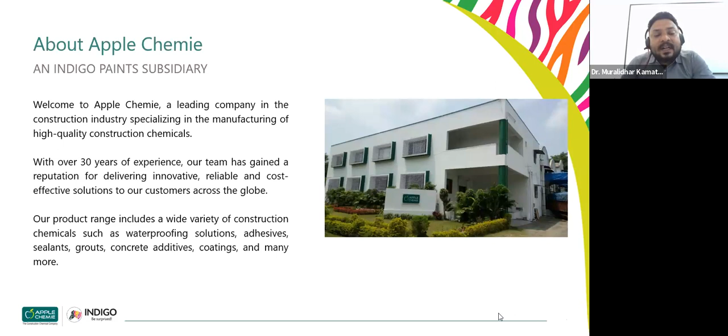It's an Indigo Paints subsidiary company, and it's been around for the past 30 years, and we are providing a range of construction chemicals like waterproofing, adhesives, sealants, grout, concrete additives, coatings, and many more. What is Apple Chemie? India's only concrete tech company, manufactures more than 150 products, 25 years of experience, geographically centered in India, and the first manufacturer of PCE. What is PCE? It's polycarboxylic based ether, and we brought that plant for the first time in India, and we have presence on a pan-India basis too.

Why is it innovative? First, polycarboxylic based ether, then AC Crystacrete, which is a crystalline durability enhancing admixture. I'll elaborate more about Crystacrete - it's available in Bulker form, and we have 6 patents. These are the patents, I'll be quick over here. This is a granted patent, and this is the pilot plant.

Whenever we talk about polycarboxylic based ether, you may know it by the name superplasticizer or plasticizer in your books. There are different types of base for this. I'll come and explain about the bases, but that will come in the admixture part.

Okay, that time you can see over there what is PCE and how we are calling it a base. So these are the pilot plant. This is our R&D facility. It is in Nagpur. This is in Mumbai.

I'll start with the crystalline admixture because I don't want to waste much time. It's been on the internet too. So what is crystalline admixture over here?

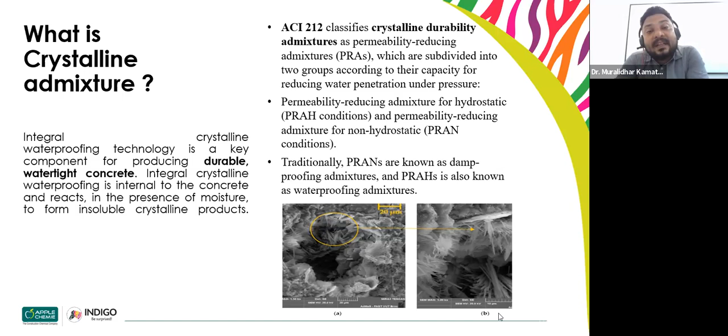You can see projects like Samriddhi Expressway, Delhi Mumbai Expressway. In their specifications, we have to add this crystalline admixture to enhance the life span of the structure. Similarly, if you check the bullet train specification, there also you are required to add this crystalline durability enhancing admixture. So this is one of the products we are also supplying.

It is a cementitious product, and it will plug your pores, capillary tracts, and micro cracks will also be reduced, blocking the entrance of water. Due to crystal formation, whether it be chemical attack, water in coastal areas, or environmental conditions wherever your concrete is exposed, whenever concrete gets deteriorated, it goes through the cracks or pores only.

That is called transport property. It's a new term, maybe you have to find out what is the transport property of concrete. Because of carbonation, air and moisture get transferred from inside the concrete, and that creates a problem. Due to that, the crystalline durability enhancing admixture is added.

This is ISO patented technology. If we add this in your concrete, you can see the fourth picture above, the CE certificate, CE being the European certificate. In that, let's say if you add this material in concrete...

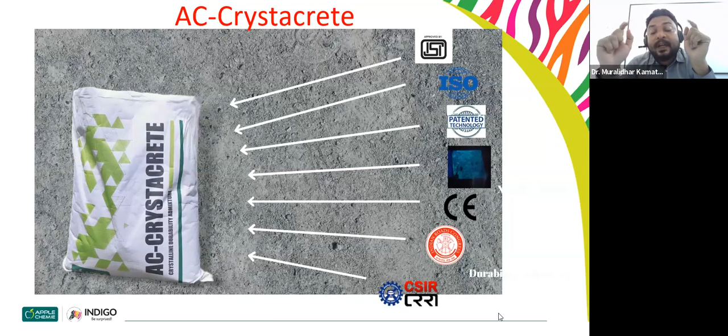You have to wear UV glasses and scan the concrete to check whether it was added or not, because for quality purposes it gives a fluorescent color. So you can check in the concrete for quality purposes. Crystalline admixture present here will self-heal and give durability to your project.

These are the testing facilities. You have to do the Marsh cone test, that is for compatibility with the cement. Because when you are adding crystalline, the main component will be cement or cementitious component, so you have to check the compatibility of the crystalline durability enhancing admixture, then sulfate resistance test, then rapid chloride test.

Sulfate resistance relates to chemical attack, right? And rapid chloride penetration is tested as per ASTM C1202, the latest code being from 2019. From that you have to check, and we pass the ions. I'm going to explain this experiment a little bit further.

Then self-healing test, this is a lab test. Then mortar permeability - maybe many people are not aware of mortar permeability. At last, whenever you test the crystalline durability enhancing admixture, water or any ingress chemicals, or whatever environmental condition is outside, it is not going to travel through your aggregate, it is going to travel through your mortar phase only. So due to that, the mortar permeability test is there.

Concrete permeability has two tests, I'm going to explain in detail. First is depth of penetration which we check, and then we check coefficient of permeability. Both are different - depth of penetration requires four cycles, and water permeability requires only one cycle.

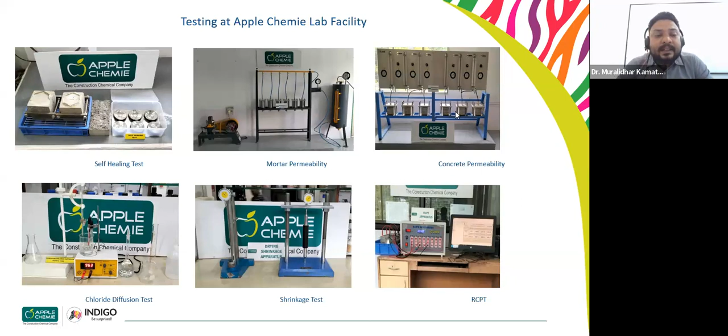Then your chloride diffusion test, shrinkage test, RCPT - these are all required tests. Testing has to be done from various authorities because you have to rely on a third party. If I am saying my material is good, it's not like that - crystalline durability enhancing admixture has to be checked through many various third party authorities.

Then what's the difference between integral waterproofing and integral crystalline waterproofing? In the market there are these two terms. Integral waterproofing adheres to IS 2645. Integral crystalline waterproofing is part of your concrete itself.

It adheres to ACI 212.3R-10, chapter 15, as I already said. Here it is not going to block your micropores, but in crystalline it is going to the micropores and it resists hydrostatic pressure.

In piling in Mumbai region or any coastal region - let's say Chennai, Mumbai, or Vishakhapatnam - wherever they are doing piling up to 100 or 200 meters, for the concrete piles they need to check with 16 bar water pressure, not 5 bar. The regular water permeability test is of 5 bar water pressure, but in the case of pile condition, they require 16 bar. At that time also this crystalline needs to be added.

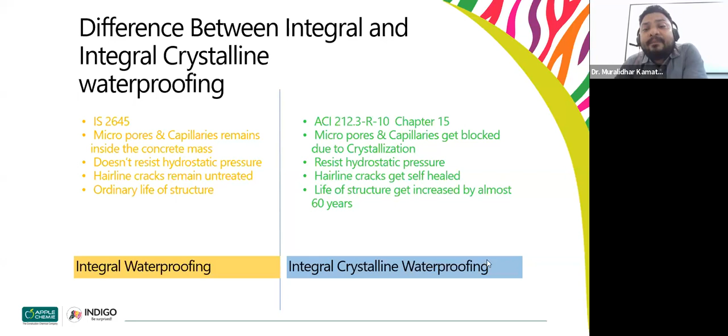So that's the advancement in construction - it's not only about cement and micro materials we are going to add nowadays. The crystalline products are being used, and the hairline cracks get healed, life of structure gets increased. How it is going to increase, that also I'm going to show you. And it is available in bulker.

Then the relation between durability versus permeability of concrete. What does durability mean here? Durability of concrete means the ability to resist weathering actions, chemical attack, and abrasion while maintaining its desired engineering properties - meaning whatever the compressive strength, flexural strength, or mechanical properties are, it should not be changed, if I am going to add this crystalline material.

As a designer, whenever you are going to design, let's say from IS 10262 - updated from 2019 I think - if you check over there for design service life, the mean strength Fm is equal to Fck plus 1.65 into S, where S is standard deviation. If we check this overall equation, there is no term called T - there is no time, right?

So we are not designing our concrete for any time. We are saying it is going to withstand 40 years, 50 years, 100 years - we are saying it, but we are not using time in our design. We say design service life will be 50 years, but when we are checking with permeability, the latest code is going to develop.

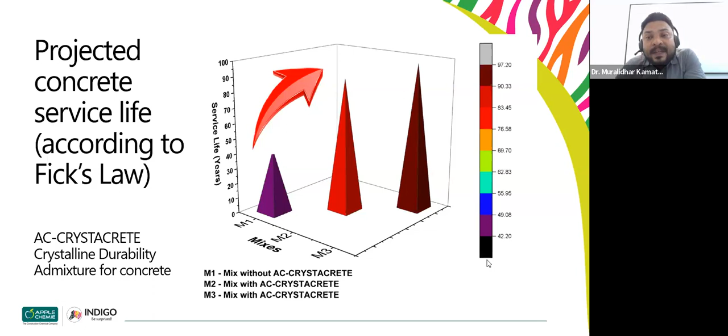Then Crystal Mortar, sometimes mortar is also required as a repair material. One of the sites I'll mention, I've been at a Shapoorji Pallonji site in Mumbai, the BDD Chawl site, a building going up to around 40 floors. They already excavated up to 18 meters below, and what happens is the water table is very high in Mumbai.

So after the shore piling also, they give the retention wall to the soil just after that, because we can't move soil since there are buildings in the vicinity. So this Crystal Plug is used, it is in powder form, wherever water is coming we have to put it and block that.

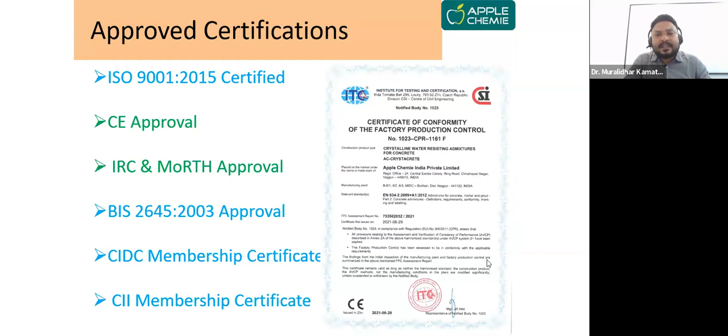And we have approval authorities there. I think it is not right now, but we have to get approvals from the industrial part. We have to go through all the approvals, then only we can apply this Crystacrete.

Then the application method of Crystacrete, how it is going to be used: nowadays we are using only ready mix concrete plants, so you can add it directly into the RMC, it comes in 25 kg bags, you can add it there or add it inside. Then you can apply it as a surface coating, for sealing cracks, and for the heel.

Dry shake I already explained recently. These are the surface preparations.

Now, what are the advantages? Here you can see, below there are cracks of 2 mm. This is after cracking and before cracking, you can see. And it reduces and can heal up to 0.5 mm crack healing.

As you can see, this is a test we are doing, a lab-developed test I created. I connected it with pumps supplying a continuous head of water throughout. I am cracking a concrete cube of 150mm, splitting it, then creating a watertight seal and keeping that water pressure over it. If it does not self-heal, water will pass through. If it self-heals, water will not pass.

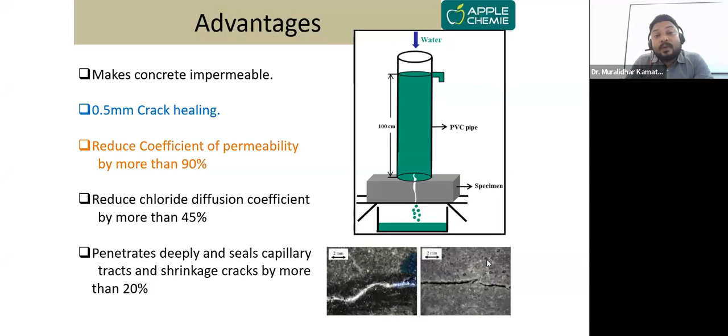And it should have coefficient of permeability improvement of more than 90%. Chloride diffusion should be reduced by around 45%. And shrinkage should be reduced by more than 20%. It allows concrete to breathe while protecting it.

If it is an integral part of the concrete, it is going to protect your steel bar from corrosion, and I'm going to speak a little more about corrosion later. And it has effective resistance, as I already told.

Now if I'm adding crystalline product into our concrete, I need to test it. What are the testing parameters? The specification always says how we are going to test it and what will be the parameters.

So: rapid chloride penetration test, water penetration test, and self-healing capacity. Okay, these are the tests.

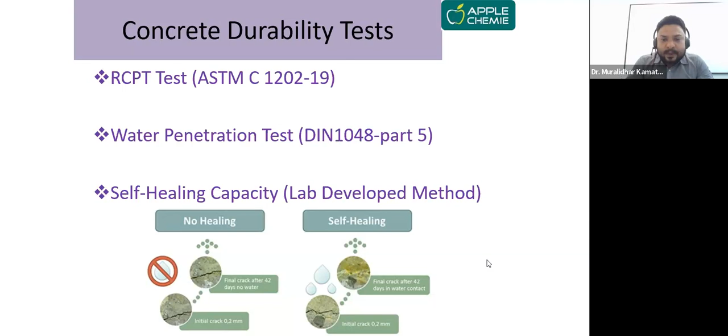Now here you can see the water penetration test. It is as per DIN 1048 part 5. The fixing screw and test specimen are kept under water pressure of 5 bar.

We keep it at 5 bar for 72 hours for the water permeability test. After 72 hours, up to 48 hours, we keep it in a drying cycle, meaning the water level is removed and the cube dries. Then we split it and check the impression of water penetration on the concrete surface after splitting, and mark it. This is one cycle, where you check the depth of penetration.

But what about the coefficient of permeability? You cast two cubes, one with crystalline mix design and another without crystalline mix design. Three cubes are cast at a time, and kept for cycles.

There will be 4 cycles: 72 hours of water pressure, then 48 hours of drying cycle. This is one cycle. Then you repeat 72 hours of water pressure, 48 hours of drying period. Similarly for the third and fourth cycles.

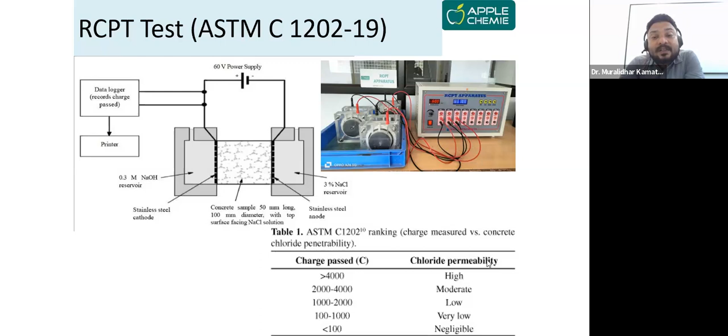At that time you require the advanced chemical, because they are targeting the age of the concrete. They are trying to build the structure for 100 to 150 years. Due to that, they use this type of material.

So liter per hour is what we are measuring. If it is going to zero, that means the water passing through is getting self-healed. Wherever the water supply is going on through the cracks, that means it's not getting healed. So it's like that.

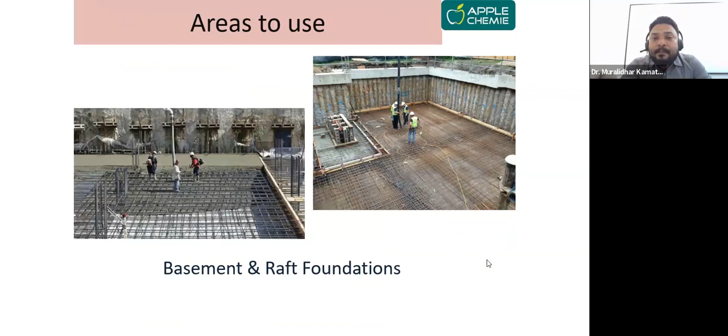The experiment is just a self-development method area to use, where generally, as I told, at the foundation level, as you can see in this image, sure piles are there at the foundation levels. And then precast girders, shotcrete, swimming pools, water retaining structures, aquarium, retaining walls, sewage and water treatment plants, underground vaults, elevator shafts, dams and reservoirs.

And already we supplied to Nagpur, Mumbai, super communication expressway, Delhi Metro, Thane Creek. Recently it's going on at Thane Creek Bridge, which is being constructed by L&T, as I've visited and I'm working with them.

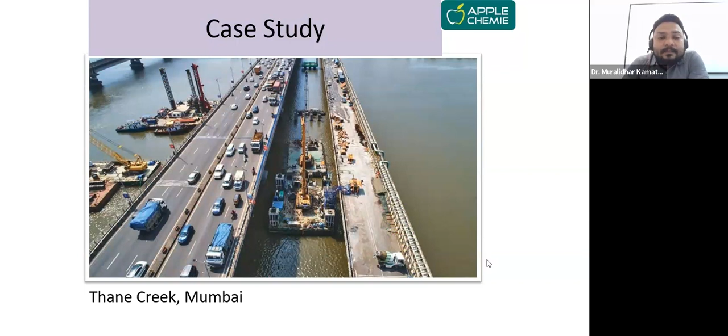And then CIDCO housing project is a mass housing project. I've been to BG Shirke, who is one of our clients over there. They are casting at a precast yard - you can't imagine how much concrete is going on. I've been there for a month to resolve some of their technical issues. The daily concreting is 1500 meter cube per day. That amount of concrete and that amount of panels they are casting, almost like machines. It's been a good project, CIDCO going on at Taloja.

One more example I'd like to quote here - L&T delivered one of their recent projects, and we were involved in that: 75 days, 75 flats. This is the rapid construction industry I'm talking about. L&T did this in Mumbai - you can search it on YouTube, it's available. Also Chhatrapati Shivaji Maharaj International Airport, Versova Bandra Sea Link - these are our clients.

This IRC also mentions crystalline durability enhancing admixture - that's what I'm talking about. I told you about our crystalline durability enhancing admixture. Now I'm coming to admixtures. What are admixtures? Why are we going to use admixture?

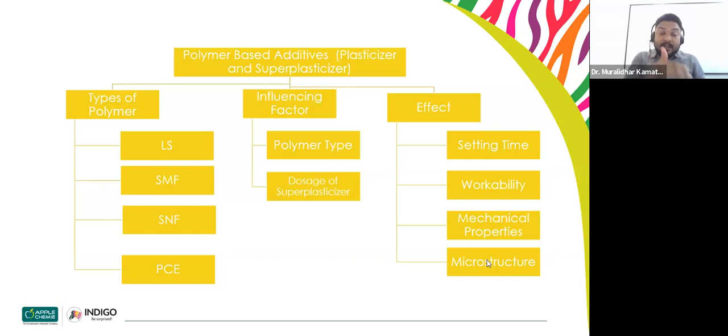An influencing factor here - if you're going with ligno base only, you can go with 1 hour maximum, there won't be much more. Nowadays everyone is asking for self compacting concrete, free flow concrete, or pumpable concrete at the industry level, so you can't go with LS for that.

SMF is also not compatible, because they're using 3 to 4 types of brands of cement - sometimes 43 grade, sometimes 53 grade - again source of aggregate, source of cement, source of whatever material you're using, it's changing totally. So you require great compatibility with your admixtures.

Then sulfonated naphthalene formaldehyde you can use, but not everywhere. With that you can achieve SCC, but the admixture percentage and chemical required will be more. Then with PCE you can go from 0.5 to 1.5 percent, depending on your aggregate, design, and grade of concrete. Dosage of plasticizer is also an influencing factor here - it can affect your setting time, workability of concrete, mechanical properties, and if it's a higher grade of concrete, then for sure it affects the microstructure.

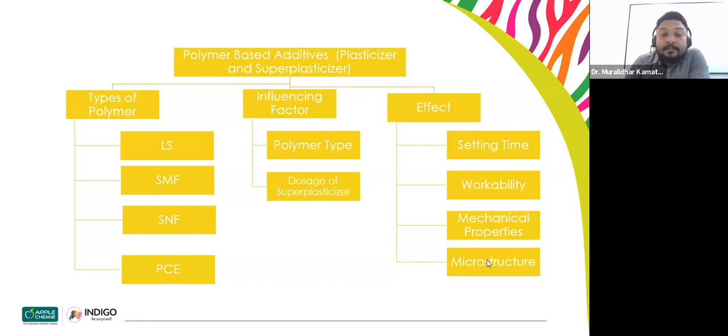Plasticizers are chemical compounds that reduce your water percentage whenever you use them. The water-cement ratio is inversely proportional to concrete compressive strength. So if I reduce the water, the concrete compressive strength is going to increase. This helps and makes concrete denser.

Plasticizer and superplasticizer are nowadays added in the range of 0.1, 0.5 to 1.5%. Many people ask me, can't we go above 1.5%? I'll give an example: Okamura developed self-compacting concrete in the 1980s, and he started with 6% of added chemicals at that time. So it's not that you can't add above 1.5%, depending upon your need you can add that.

Plasticizers - lignosulfonate is a natural polymer, that we call plasticizer. Superplasticizers will be SNF, SMF, and PCE.

Nowadays whatever you are buying, whether from Fosroc, BASF, or Apple Chemie, we are giving you a product where there will be an air entraining agent, and in that only there will be a defoamer. Generally we use it for silt content, wherever silt content is high, because nowadays we are not using natural sands, we are using crushed sand. With crushed sand, the silt content will be from 15 to 20%. It's restricted to 15%, but at sites it won't be like that, it will be 20-25%.

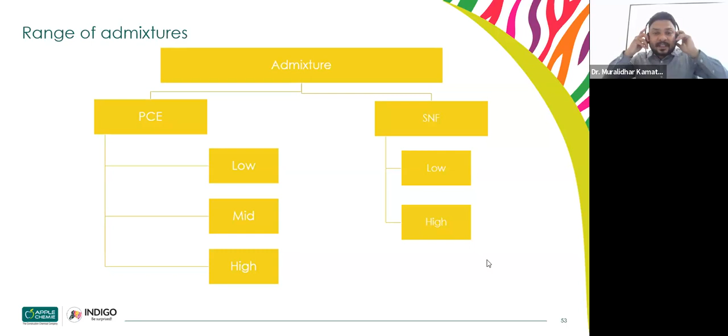Nowadays, as I said, the precast industry is asking for 10-hour strength. After 10 hours they require 15 MPa or 20 MPa because of lifting strength - they are going to lift the precast panels, so due to that their requirement is like that. And SNF will be low and high range, there's no mid range over there.

Then I'll come to curing compound and protection coatings. After you add your admixture to the concrete, there will be evaporation losses, and you require full hydration of the cement to achieve full compressive strength. Nowadays we are thinking more about sustainability and environment parameters, and we are not going to use water there - we are applying curing compound instead. Yes, there will be some environmental impact in production, but water is going to be saved. So evaporation losses are reduced, and it also helps reduce shrinkage cracks.

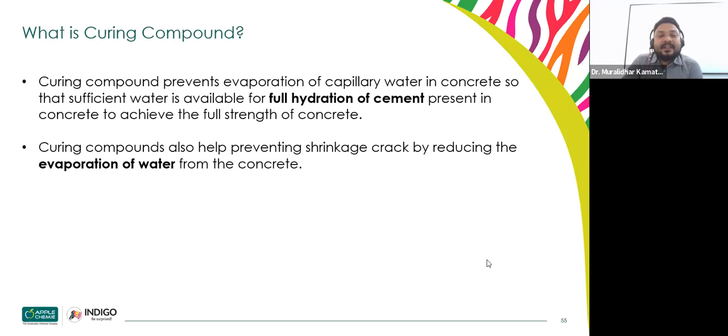Curing compounds are resin based, wax based, or water based. I'll explain it simply - whenever you use this type of compound, you have to ask your applicators, contractors or construction people whether they are going to paint, use putty, or whatever the surface requires, like in a building, metro project, or bridges. Depending upon what they are going to do, because over resin and wax based you can't paint or do anything, so that time water based is suggested. Generally in the housing sector we suggest water based curing compound.

These are the curing compounds - resin based, then aluminized reflective type, water based, wax based. Wax based is generally used for roads and canals, irrigation projects where there will be canals. Regarding coverage, we check curing efficiency, and drying time should be less than 4 hours. If you look at the various effects of curing practice on strength, in the laboratory, air curing gives less strength than moist curing. After 7 days of moist curing, the strength is comparatively 4-5 MPa more.

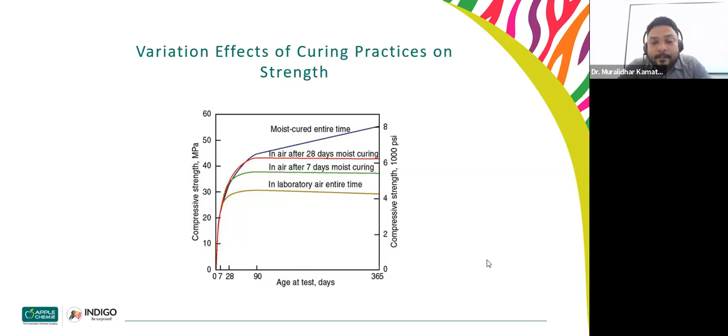Again, when in air after 28 days of moist curing, the strength is gaining over there. But moist cured entire time, meaning throughout the time we are curing, it is gaining again above 50 MPa, meaning after 365 days when we are checking. Okay, these tests are saying about that.

What are the properties of curing compound? Curing compound, whenever you are going to apply, depends upon water retention, and it should be conducted as per C156. Then reflectance is the one thing where you check the daylight reflectance after applying your curing compound. When should you apply curing compound? That will be a question to you. I'll explain to you case by case, maybe I already explained it, I'll check. If not, I'll go explain that.

Drying time, the test should be conducted as per ASTM C309, class number 10.3. Then long term for routine, this is the routine test. Setting we will check, but generally it should be less than 4 hours. It should be tacky, just you will check it is tacky, then fine. Non-volatile content.

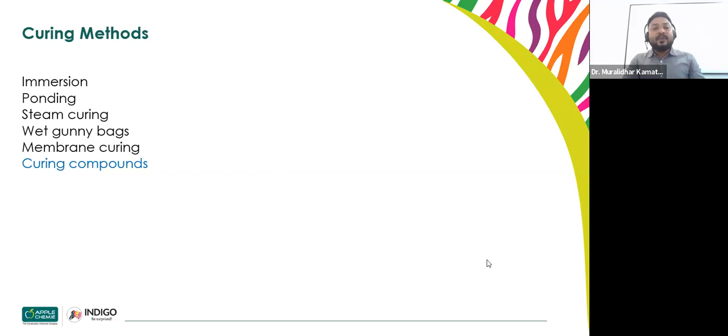Then there are curing methods in concrete: immersion, ponding, steam curing, wet gunny bags, membrane curing, then curing compound. So curing compound, whenever you are going to use, you can use in all structures: PQC pavement, structural members, columns, beams, canal lining, runways, bridges, decks, etc.

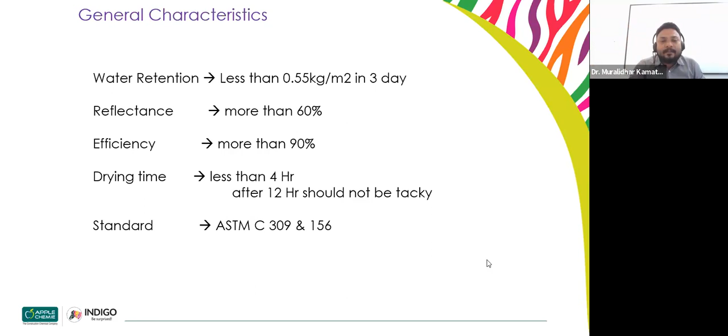And what you will do over here, you will cast the cube. One will be with curing compound, one will be inside your water tank for normal curing. In the lab, we apply the curing compound like a paint over the cube, and it should dry in less than, and it should be after 12 hours. It should not be tacky, we will check it, and it should be as per ASTM C309 and 156.

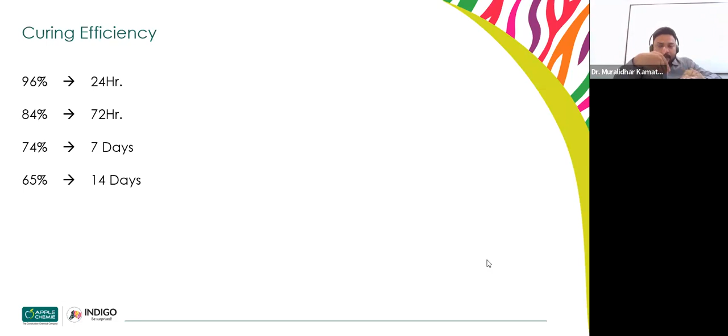The curing efficiency: at the first day when you check, the evaporation losses over the curing efficiency will be high, like water. Then after 72 hours when you check, it starts to diminish from the surface. Whenever curing compound we apply, it will get removed from there a little bit. Then after 7 days and 14 days, your curing efficiency will be around 65%, meaning the water is not there anymore because the membrane curing paint we applied will get removed, that compound gets removed.

And let the bleeding water dry, meaning at the top surface, after finishing your concrete surface, the bleeding water should get dry over your concrete surface.

And after your PQC, when you are doing your texturing and spraying, if you see that paver machine creating the PQC road, there will be one drum and two sprays there, and they will spray this curing compound after the green concrete, as you are doing the texturing of concrete. After that you apply the curing compound.

For structural members, if you are going to cast your beam and column or girders, whenever you remove the shuttering, that time you have to apply it. And you have to stir whenever you are applying curing compound for the protection coating. You have to first stir it well and make it homogeneous.

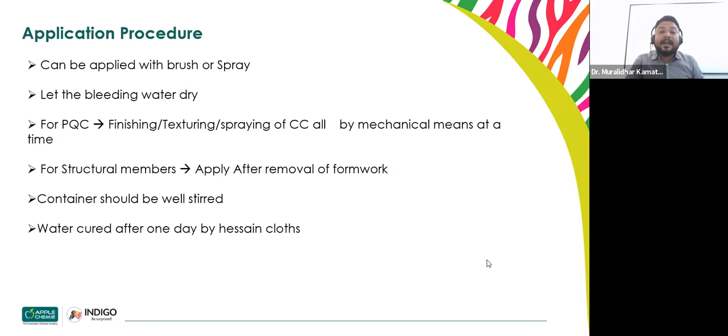Okay, and you can do water curing after 1 day by Hessian cloth also. This is one of the L&T's first segment for the third Mandovi bridge, Goa, and it came in Times of India, 25th of January 2019. Water conservation, what I am talking about: we saved over here 10 crore liters of water, it came over there. So that's what I am talking about.

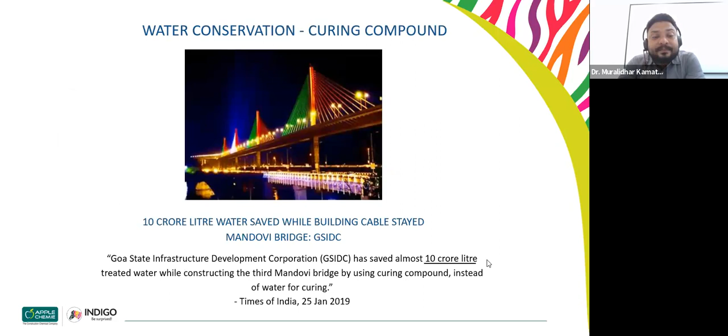Okay, you have to recommend the curing compound as your next generation solution, going to work at site and various places. So then again there are evaporation retarders also there, it will help, it's like a curing compound.

Generally in our region, the temperature will not go with 20 to 40 degrees Celsius throughout India, but in regions like Jammu Kashmir, you can find that the temperature will be low. At that time, evaporation retarders will be used.

Again, for protection of your foundation coating, there is coal tar epoxy based protection and curing membrane. Generally it will be a black surface applied to protect our foundation, because at the foundation level it is an extreme corrosive environment due to sulfate and chemical attacks from the soil or the ingress environment there.

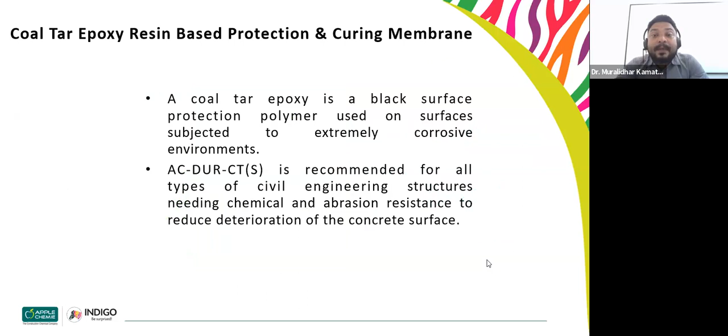These are curing compounds, and now I am coming to sealants. Sealants are used, for example, when we cut the groove in our PQC road for the 300 depth of concrete PQC road. When we are cutting, we cut it up to 100 or 50 depending on spec, generally 75 we do.

Then first we apply the primer over there, because we are putting the backer rod and there will be polysulfide sealant. So between the concrete surface, the sealant, and again the concrete surface, we require some primer to apply there so it sticks properly. Due to that we use it.

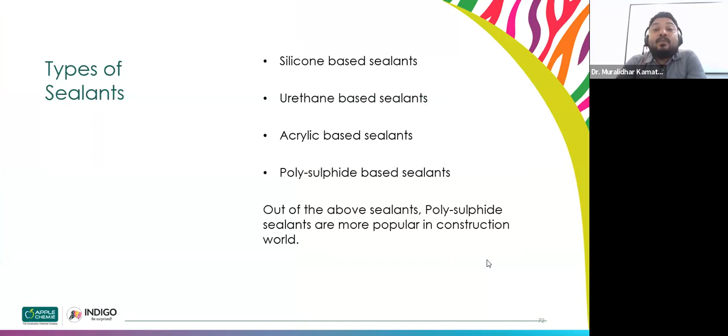The types of sealant depend on whether it's silicone based, polyurethane based, acrylic based, or polysulfide. Generally, out of all the above, polysulfide sealants are more popular in the construction world, because polysulfide sealants can be used in basements, glazing frames, ceiling joints, floors, roofs, external walls, claddings, and generally also in bridges. You can check and see it whenever you visit such structures.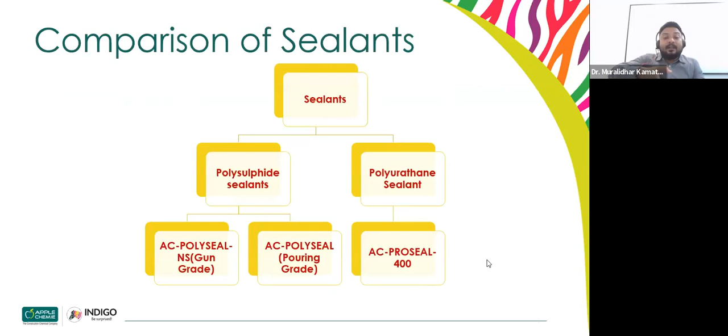Again, in sealant comparison, polysulfide sealant and polyurethane sealants are also being used, and that depends on whether it's gun grade or pouring grade - meaning you can pour it also, that also comes.

Over here you can see after the application, here in a building. It's used because concrete is exposed to environmental conditions, the cycle of temperatures changing - day and night temperatures are different, going through the full temperature cycle. Due to that there will be expansion and contraction.

So due to that we also call it a construction joint, or expansion and contraction joint, depending. It will be there vertically, and depending on the flow of traffic, that is the longitudinal joint, and perpendicular to the flow of traffic there will be the transverse joint.

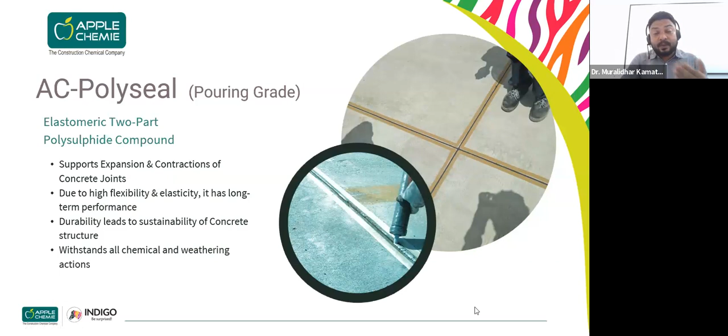So generally in the longitudinal joints you will check that this polysulfide sealant material will be there. Over here the gun will be used, and after finishing the surface of this polysulfide, there are two component and three component types, with fillers. Here you can see before and after applying.

Now we are going to start with adhesives. Segment bonding adhesive generally we use for precast girders, generally for bridge construction and metro projects, to establish a structural bond in between. So very simply, the grade of concrete will be M60 or M80 over here.

So this will be M60 grade of concrete on one side, and M60 grade of concrete when we are joining this. So this will be your critical section of crack whenever the load is going to be there.

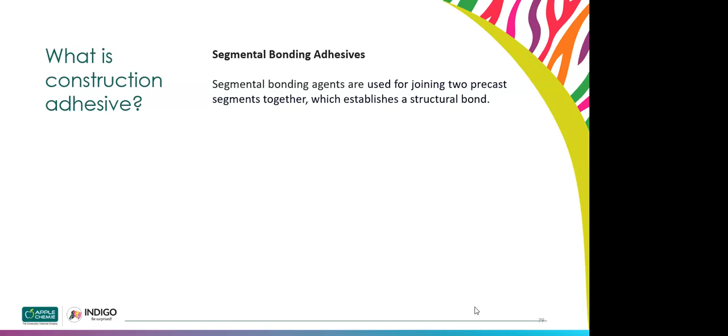So this will be your critical section for your crack. This joint should be—if this grade of concrete is there, above that the grade of segment bonding adhesive should be above M60 grade of concrete, whatever adhesive you are using.

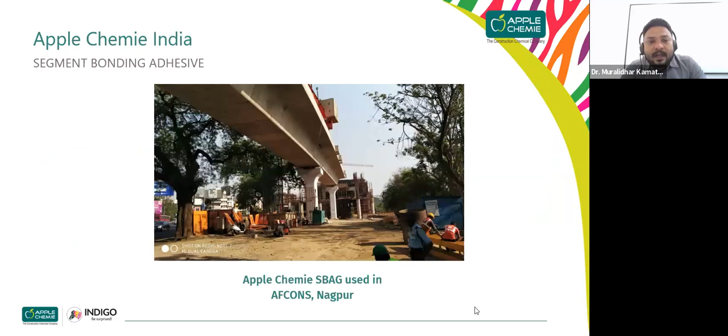I'll show you over here. Here the segment is there. This segment, there you will find out the joints. Here, see this segment is there. Right here, you will see the female and male joint.

Remember one thing: this is for bonding agent, that is for joining at the construction site. So these particular two segments we are going to join—on the right hand side you can see the female joint, left hand side you can see the male joint. The male joint, when you are seeing it, is in the trapezoidal section, and this angle should be 10 degrees. If that is not matched properly, the concrete will come out and it will not be clear.

So why we are using segmental bonding over here? We have to mix this component. It comes in two components—component A should be mixed properly, then after 15 seconds—and this should be mixed at 400 RPM using whatever electric mixer we are using at the site. The speed of your mixer should be 400 RPM, and it will be applied as a thick paste, applied to the surface of your girders.

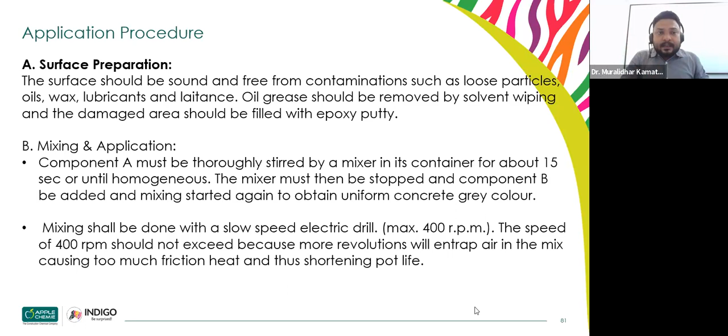You can see where we are using this segment bonding adhesive. Here you can see these segments. This is again from Vijay Nirman, where we worked in Sonipat, then Afcons Nagpur. Then again, there will be, depending upon your temperature—

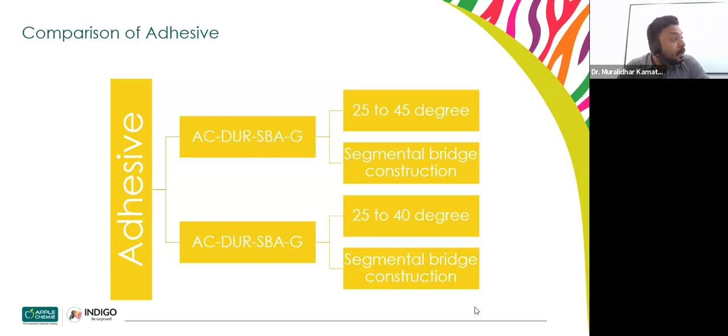Depending upon temperature, you will find the segment bonding used below 25 degrees and about 25 to 45 degrees. It's generally used here, maybe by mistake it is written 25 to 40 degrees.

Then there is the debonding agent. What happens is, whenever you are going to cast the girders at the site, the male and female joints will be created together—two segments will be created, so that should be separated. Due to that, they have to apply the debonding agent or anti-bonding agent. It is applied at the face of the precast segment during the match casting. Generally we do the match casting over there.

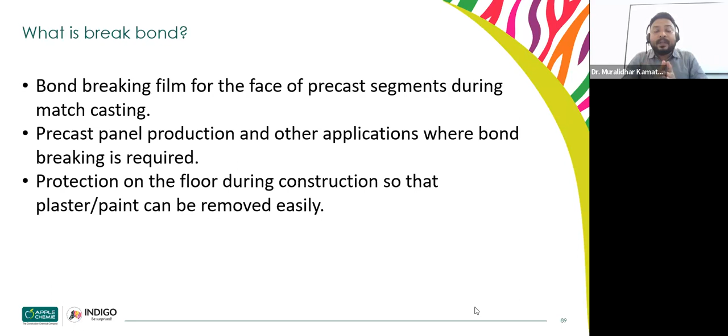Precast panel production and other applications like bond breaker protection of the floor during construction, so that the plaster or paint can be removed easily.

Over here I explain—here we generally apply these segments. We will cast, and they give a unique ID for all the segments when they are launching the girders at the site, so one female joint or other female joint won't get mixed up. Whatever they cast at their precast casting yard—

This particular segment is from one of our sites—we were working on APCO, that is for Versova Bandra sea link, going on in Mumbai. So from that site, this particular picture is—I only took this picture.

This is generally a single component, ready to use. Just you have to apply it at the concrete surface. It is water based and it will be removed from there. Advantages: economical, high coverage rate, solvent free, easy application, ready to use, and no fire hazard problem there.

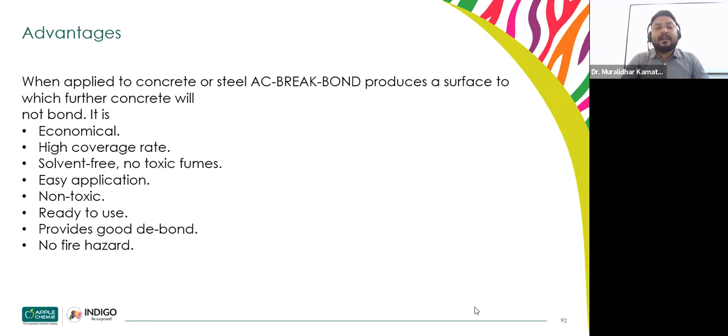Then one more thing I'll talk about—corrosion later. Corrosion inhibitor solution. Now, because we are talking about durability of concrete, I said performance based mix design we are talking about—now construction industry is purely talking about the lifespan of the structure, service life. So it will be added in your concrete in liquid form. Now recently I came to know there is a powder form also available in the market, but it's still not so popular—corrosion inhibitor solution in powder form.

Yes, for sure, your liquid form is popular and it will be added from 1 to 3%. It is used in Chennai metros and all these metro projects, government projects, Pradhan Mantri Awas Yojana - every specification mentions adding it for protection of your reinforcement. So this is the bipolar corrosion inhibitor. What it does, I'll explain more.

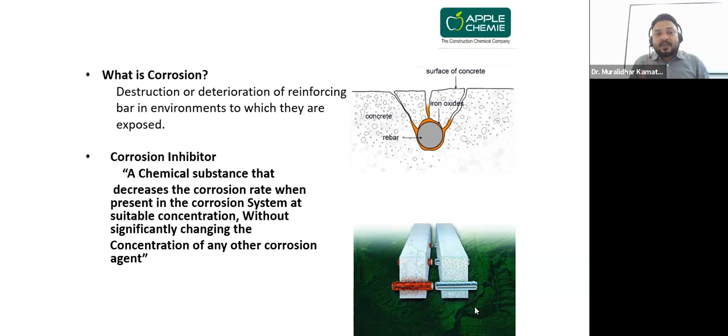How it works over there - whenever your reinforcement, rebar, is there, generally I'll talk of rebar as Fe2 plus valency, keeping it simple. Fe2 plus valency - when it gets in contact with moisture, that valency changes from Fe2 to Fe3 plus. This means volume expands, and that creates a crack at your concrete surface, and deterioration happens because corrosion initiation will start and it will deteriorate your concrete.

Generally, whatever corrosion failures are there, it's due to failure of material. Statistics indicate 40% of structural failure is due to reinforcement. Whenever sulfate or chloride attacks the concrete, reinforcement corrosion will appear in coastal regions and other areas wherever it gets in contact with the subsurface level.

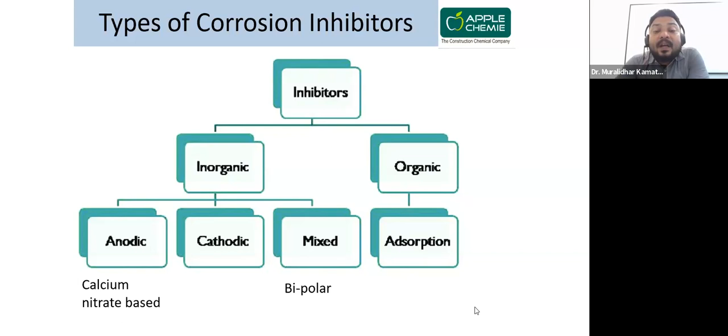Again, the types of corrosion inhibitors are there - inorganic and organic. In inorganic, there are three types: anodic, cathodic, and mixed. In organic, you'll find adsorption corrosion inhibitor, generally calcium nitrite based. Nowadays in specifications they mention the nitrite should be nitrite-free. Due to that, mixed bipolar corrosion inhibitors are being used recently. As you can see, the anodic inhibitor is calcium nitrite based, and bipolar is nitrite free - that's the comparison.

This is the Corroguard BP. It will be available as a brownish liquid, mild. If you order it, you will find a little bit of ammonia odor - no irritation. pH will be 10.11, specific gravity 1.05, viscosity will be 11 seconds.

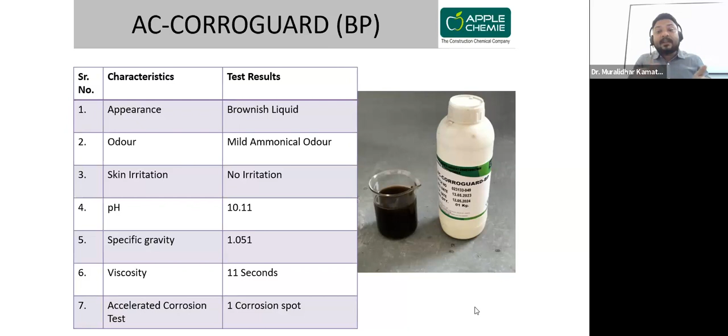Then at the accelerated corrosion test, we apply the corrosion layer over reinforcement. So one corrosion spot you can check, as I explained, this Fe2 plus to Fe3 plus change. Whenever chloride induces it, on the concrete side there is anodic and cathodic reaction going on, and rust forms, in the presence of moisture and oxidation - only then does this reaction take place inside your concrete surface.

What the corrosion inhibitor does - on the concrete surface there is a passivating film. When you add the corrosion inhibitor solution, the pH level of the concrete surface is maintained in the basic range. It will not come down to acidic level. Whenever it shifts from basic to acidic, or the pH drops from 13 to 8 or 9, that's when corrosion initiation starts. Without that shift, it cannot damage your reinforcement. So the corrosion inhibitor solution prevents your concrete pH level from reducing.

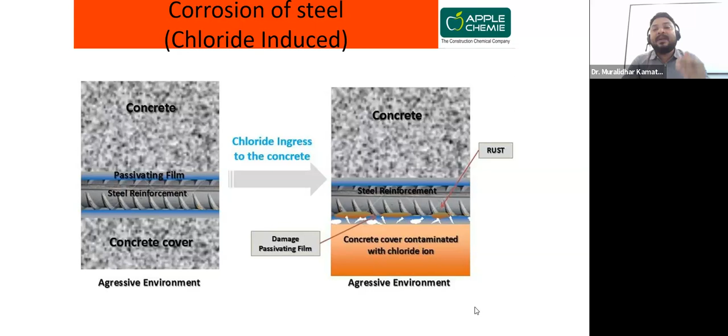And this can be tested - this is the JIS Z 1535 test. We keep our corroded steel sample inside, put it with aluminum and rubber, and allow it to remain for 18 hours at ambient temperature, then allow it at water temperature below 1 degree Celsius. Observe the specimen after 24 hours for any corrosion.

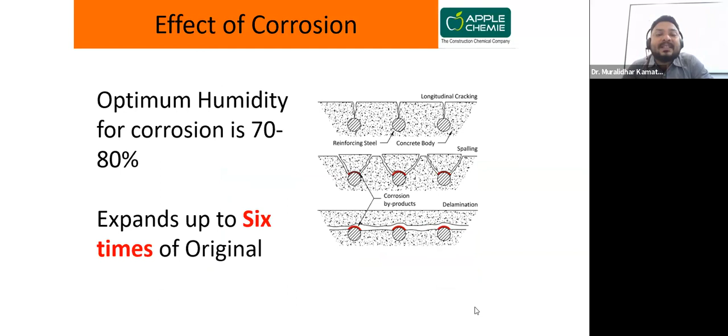Then the effect of corrosion - optimum humidity for corrosion is 70 to 80%, it expands 6 times of original volume, meaning it can expand and create concrete deterioration. As you can see, the initiation and propagation stages are called corrosion initiation.

I recently met one of them, Ujjwal Kunte. He's a consultant, the managing director of CQRA. He's the consultant - that is the consultant firm. They look after the quality. Third party means there will be a consultant - one will be the client, one will be the contractor.

Okay, and there will be a subcontractor, whoever, and the third person will be this project management consultancy or quality. Nowadays one more term is coming - the quality assurance consultancy team. So they will check your quality parameters throughout the project, and check what materials you are using to maintain the quality parameters of your project.

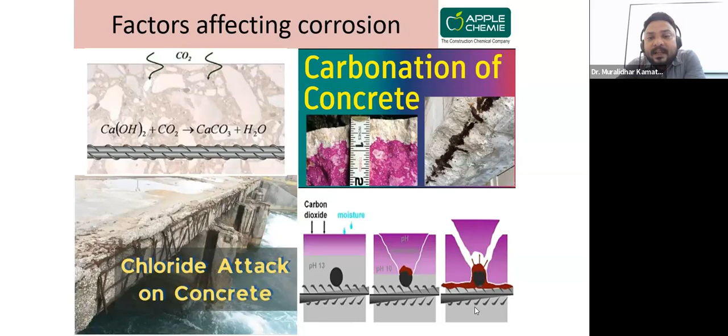Again, you can see these are the factors affecting corrosion - this is carbonation of concrete. Generally, a phenolphthalein indicator is used so you can check this. As I said, from pH 13 to pH 10, when it starts to initiate, that's when you'll find the concrete is deteriorating. Here it's exposed to chloride attack and carbonation attack, and both factors affect your corrosion.

Again, that can be alkali aggregate reaction. You can see on the surface how cracks initiate over the concrete surface. Generally this happens with alkali hydroxide present in your aggregates. The reactive aggregate generally has high silica oxide, and when it reacts, there will be formation of gel. With the calcium hydroxide present, the crack will propagate and create a crack from the aggregate, noticeable over here at the concrete surface. This should not happen, as it can again lead to corrosion.

Again, impurities in construction - whatever water you are using, you have to check for chlorides. Generally we check the pH and all, but for plain concrete and RCC surfaces, you generally check this chloride percentage. Whatever admixtures you are using, they should be chloride free also. This is also mentioned in IS 9103.

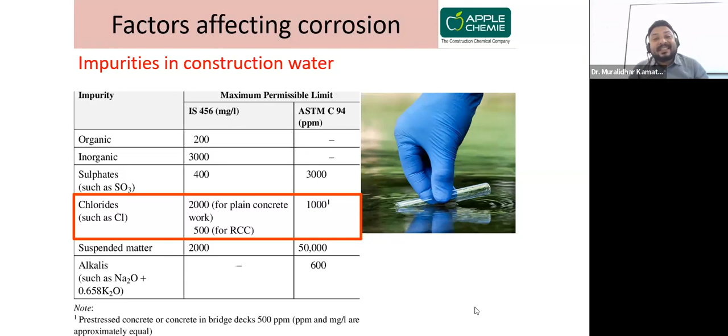Factors affecting this again - leakage, dampness, inadequacy of your concrete surface. Then there's the chloride threshold - corrosion initiation is the chloride threshold point. After that you can't use your concrete surface beyond the chloride threshold. The purpose of adding corrosion inhibitor here is to increase this threshold of your concrete - that's why we add this bipolar corrosion inhibitor. Generally the threshold value is 0.7 kg per meter cube of concrete. Above that, the chloride percentage cannot be tolerated.

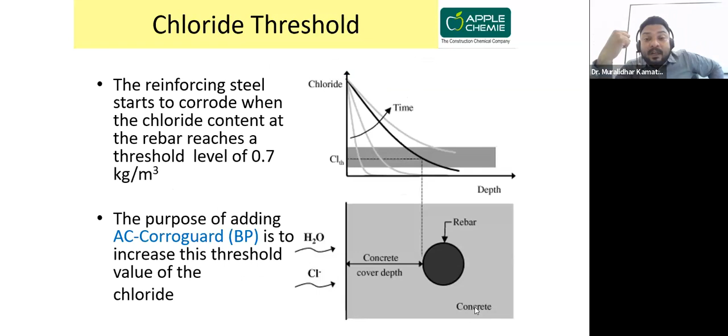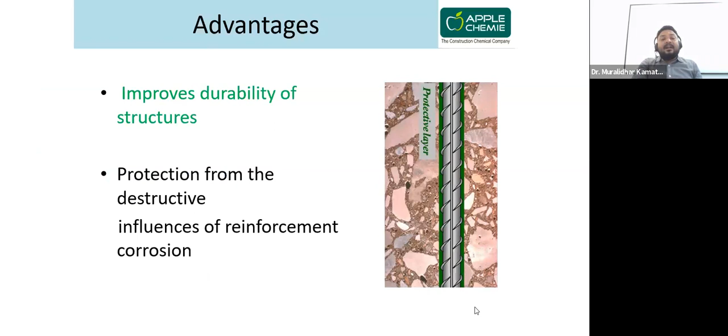Advantages will be: nitrite free, compatible with other admixtures or materials used in your concrete. No adverse effect on slump, compression, or mechanical properties. It improves durability because it protects and extends the lifespan of the structure, and influences reinforcement corrosion. It provides corrosion protection from chloride attack, does not get consumed by cement hydration - it remains present. Dosage is independent of anticipated chloride level, because as I told you, 0.7 kg per meter cube is our limit of chloride in concrete, so we can't increase above that.

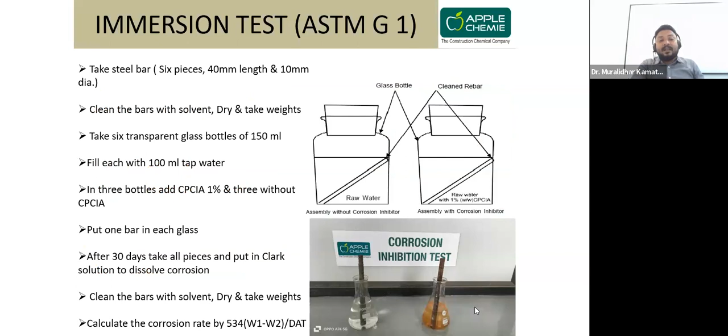Again, this is the immersion test, you can see in the picture, and we are going to check 3 bottles. One is CPCIA 1%, and 3 without CPCIA - nothing but corrosion inhibitor solution kept, and 1 with water kept, and then we calculate with 534, W1 and W2 by DAT. And these are the specifications.

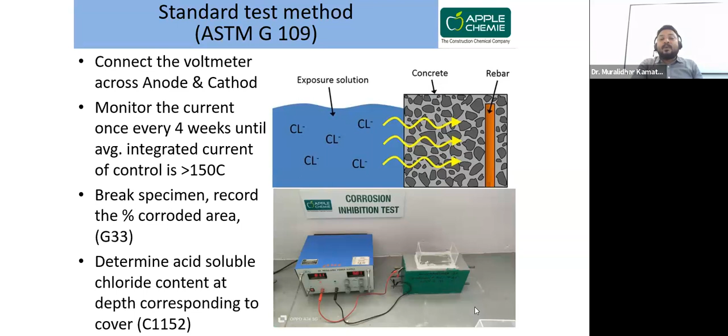This is ASTM G109. This particularly requires a year-long test, and only after a year's test can we conclude this. And here you can see, we are also testing this, particularly exposing the concrete to chloride solution - sodium chloride solution kept in this. Then we expose the reinforcement to chloride attack throughout, and check that chloride over the concrete cover surface. So again the RCPT with and without - you can see here also it is going to reduce. I already explained this test, right?

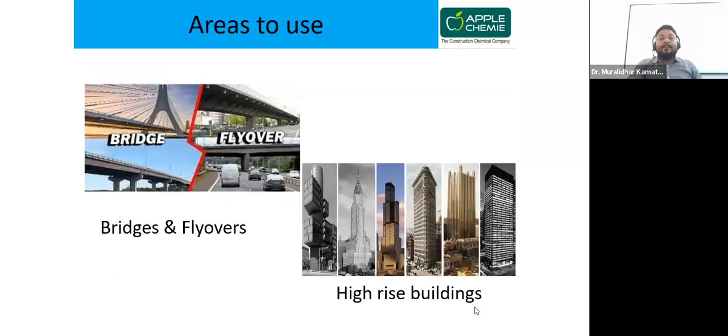Where to use our corrosion inhibitor solution - structures in sea water, for sure it is recommended. Power plants, bridges and flyovers, high-rise buildings, precast elements, tunnels and underground structures, retaining walls, industrial plants.

And here you can see the test we did with the steel sample - with 1% corrosion inhibitor, and the steel sample with tap water, that is without corrosion inhibitor. Here you can see after 28 days how corrosion initiates, without and with the inhibitor.

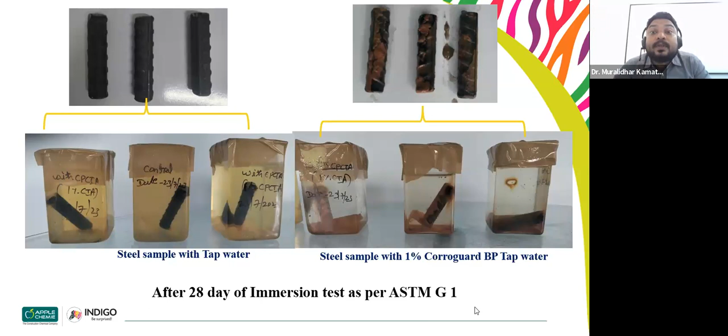And you can see at the right side of the image, it's getting interchanged. This is without the corrosion, and this is with 1% of your Corroguard bipolar corrosion inhibitor. It will create corrosion otherwise. There will not be any corrosion if you add this bipolar corrosion inhibitor.

Then there are coatings coming nowadays that we are using. Because construction happens at a very fast speed, they have to buy material at a large scale, and they don't have yards to keep it. Those steel yards will not be there, so steel will be exposed to the environment and it will create corrosion before placing the reinforcement at the site.

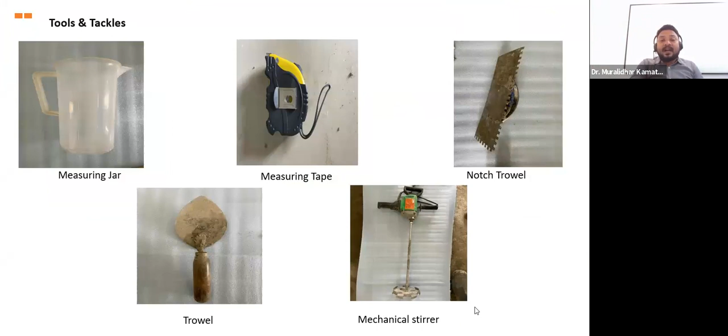At that time they have to use this particular Corroguard inhibitor. It will be added in your cement. Okay, this is 16 bar, this is one of the types. These are the instruments required: measuring jar, tape, notch trowel, trowel, and mechanical stirrer.

And we will apply it. We'll first use a metal cleaner and clean the metal throughout. Then after the metal cleaner, we will remove the rust and all the things. And then we'll mix Corroguard in OPC at 0.5 to 0.6, or a 1 ratio.

0.5 will be your inhibitor solution, and 0.6 will be your cement added in, or 0.5 to 1 cement, meaning 500 grams of Corroguard and 1 kg of your cement will be added in the paste. What we are preparing is like a paste or paint, you can say. And that will be added because it's been happening.

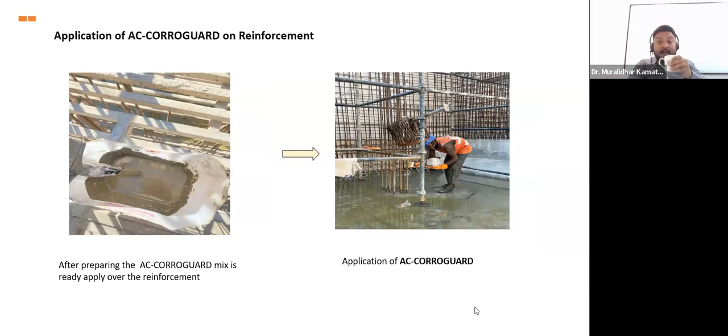This is from one of the sites, Shapoorji, where they found this out. I've been witness to that. Here, you see, after applying, corrosion initiation will not happen. This is the coverage area, and this is again. You can use the ponding method also, you can pond and do that.

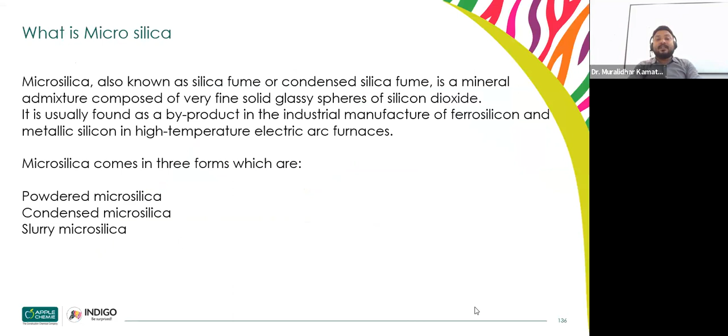Then about microsilica - this also, if you see, is being used in the construction industry a lot nowadays. It is available in powder form, condensed form, and slurry silica form. Generally microsilica will be available in grades depending on the silica content in the powder form. It is available in classifications of 85D, 90D, 92D.

But in the construction industry, they will say above 90% silica and below 90% silica, and depending upon the grade of concrete we recommend. This is our product, used for high performance concrete and self compacting concrete. It can be used for blast furnace troughs, runners, ceramic construction, parking, bridge decks, everything.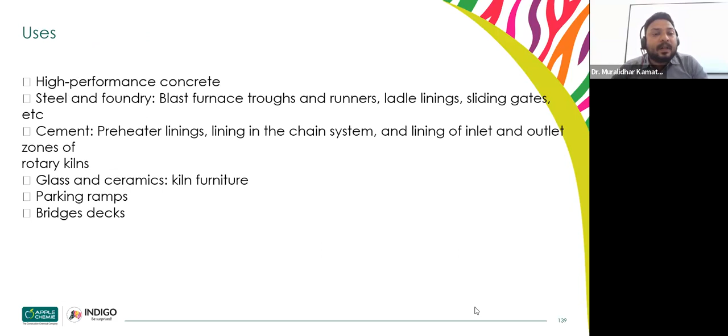Whenever we add this supplementary cementitious material in our concrete, since it's also a chemical additive, I'll consider it as cementitious. So fly ash, whenever added in concrete, is going to improve your workability, whatever the grade. And if you add ground granulated blast furnace slag, it's going to improve your later strength, meaning the 7 day strength is not going to be contributed. Similarly fly ash is also not going to contribute to mechanical or compressive strength early on.

But fly ash strength can generally be checked at 56 or 90 days, because it's going to improve only after the 28 day strength, since gel formation happens after 28 days. But in GGBS it starts from 7 to 14 or 14 to 28 days strength - I'll say 14 to 28 is the better period to say it improves the later strength.

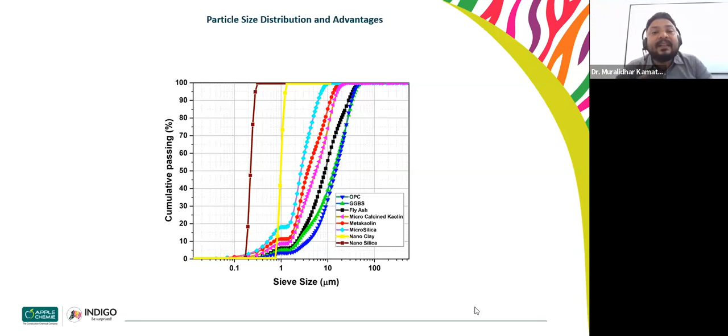Then shuttering oils will be used - I'll skip this shuttering oil because I'm having... what are the new product developments and future ready products we are talking about. See, nowadays 3D printing concrete and 3D volumetric printing or nano based concretes are required, so that requires again advanced chemicals.

You can't use that. You have to use VMA in a powder form, then polycarboxylate based ether purely you have to use. In this particular case, it depends upon buildability and printability, basically it's about yield stress, so you have to check the yield stress. It should be good in shear strength when you are placing one layer, so that before the first layer dries, the above layer should come, and the thickness should be maintained.

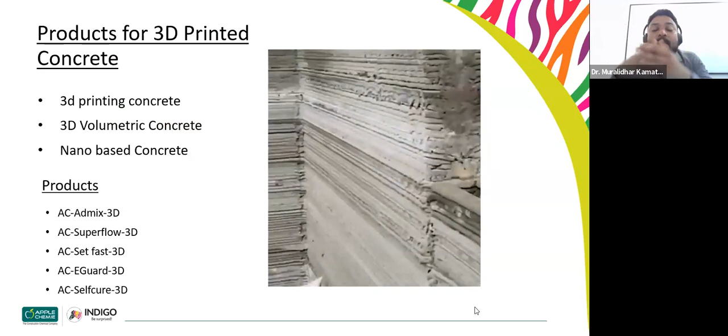I'll say we already did this before, you can see here how the printing is coming. There are good startups in India, many working from the IITs in 3D printing, and I've been associated with L&T and CBRI for this particular 3D printing, and they are doing it with alkali activated concrete. They are not using conventional concrete there.

So they have to add two chemicals, not only one admixture. You can see 3D products also in the range: superflow, set fast, e-guard - from the environment you have to guard, then it should self cure also. This is constructed at Bangalore. Again, L&T is building a 4-story building for the Border Roads Organization, going up to 4 stories of 3D printing - already it's going on, maybe at completion stage.

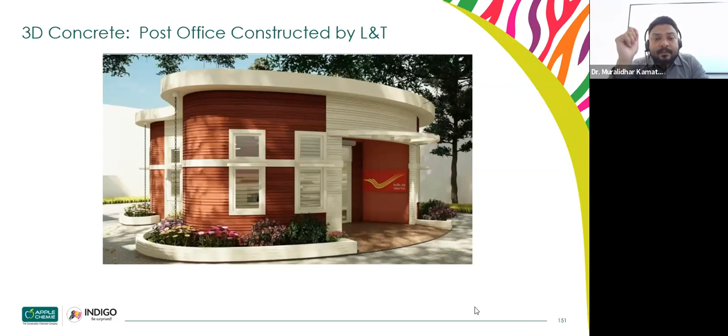Again, there is MyCob from IIT Gandhinagar, then Tvasta from IIT Chennai. They are building - there are many others, I think from Kharagpur also, one startup doing this particular 3D printing work. Now it's mainly about modernization and automation of the construction industry. And again, graphene based concrete is also one of the projects.

He's our MD who is studying graphene engineering - very high strength and high durability, but since graphene is not a cheaper material, depending upon requirement only we can suggest that.

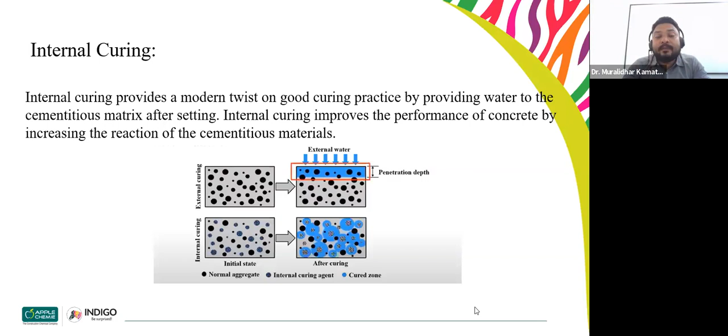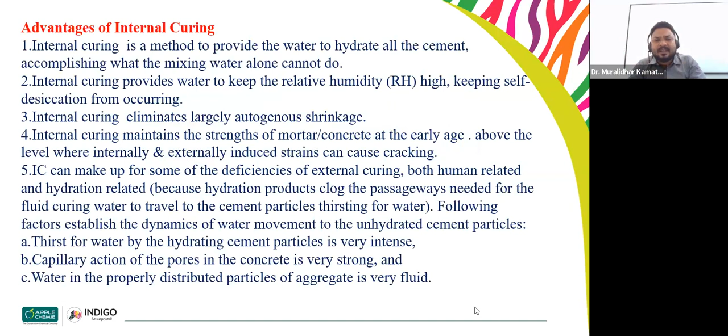Again, nowadays people are demanding that they don't want to pour - they don't want to go for water curing or curing compound. So it's called internal curing method, the modern twist where you just add one self curing compound and there is no need to add water at all. There will be a saturated chemical, a super absorbent polymer, which will allow the water internally, keeping it inside the concrete, not allowing it to come out - stopping evaporation losses. Depending on this, it largely eliminates autogenous shrinkage, and there are many other things already discussed about curing compound.

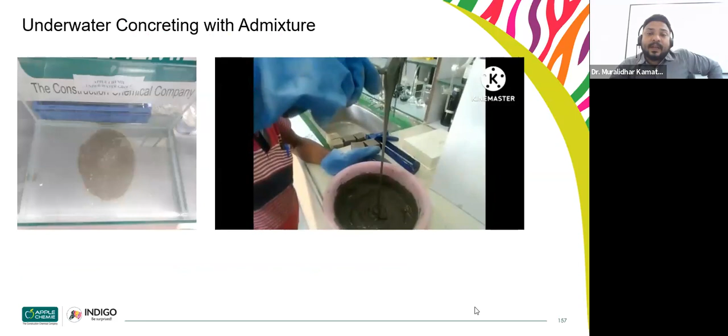Here again, this is underwater concreting. You can see one of the videos we did in our lab - underwater concreting with admixtures. Even after adding the admixtures, they are pouring it inside the water, and you can see there is no reaction with the concrete at all.

Then there is 3D volumetric construction. Nowadays Home Mission is there, then Magic Pods are there - these are construction companies doing it. We also did this - I'm doing one of the works with IIIT for 3D volumetric concrete, and one PhD student is also working with me on this particular 3D volumetric concrete.

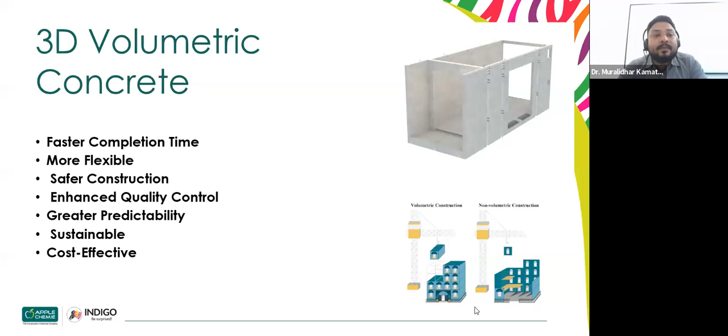And again, the nano base - nano means now we are talking not from the test cylinder, coarse aggregate, fine aggregate, cement clinker grains, gel, CSH colloids - now we are at the molecule level. That's what we're talking about with nano materials in the cement industry. It already started - macro materials are used in the construction industry, but now they are going to be nano engineered soon, and you are going to see that revolution of nano based concrete.

And then again, ultra high performance concrete, UHPC - one example. I'm not going to explain this particularly, it will be more explained and available to you, but I'll explain one project I'm working on - ultra high performance concrete with SDPL, Shinde Developer Precast Limited, Pune. They cast a 120-meter span with ultra high performance concrete of grade 150.

What they are doing over there is reducing the section thickness, so that the overall dead load of your particular segment gets reduced. So you can go with a longer span and apply higher loads over there, and the load will be less.

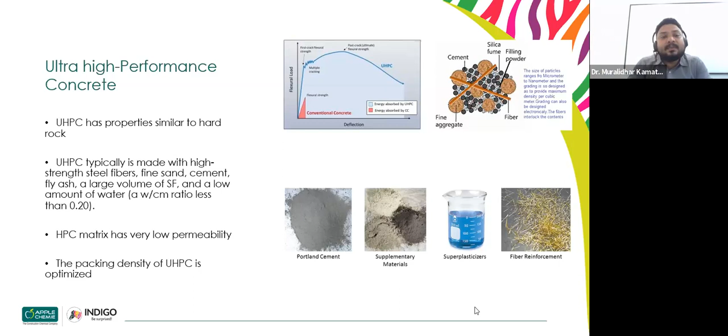And nowadays they are trying ultra high performance lightweight concrete, which has also been recommended recently. It works almost like steel in terms of elastic modulus, similar to how steel works.

Then there is geopolymer and alkali activated concrete. I did my PhD on this particularly, studying the microstructure of alkali activated fly ash, GGBS, and metakaolin binder systems setting at ambient temperature. That was my PhD topic.

Whenever geopolymer or alkali activated concrete is mentioned, I'll explain the difference. In geopolymer, there is 3D formulation with poly chains, and there is only formation of sodium aluminosilicate hydrate, and it requires heat curing. In alkali activated concrete, there will be calcium silicate hydrate, calcium aluminosilicate hydrate, and sodium aluminosilicate hydrate — it is a combination of gels. But in geopolymer, this does not happen.

If you are going with fly ash, and using sodium hydroxide and sodium silicate, that is geopolymer concrete. If you are going with fly ash and GGBS, that time it is alkali activated concrete.

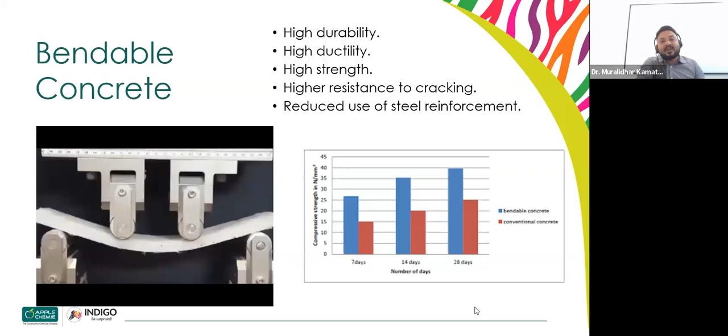Again, it's in demand — they are saying go with bendable concrete. This also requires high durability, ductility, strength, and resistance to crack. So again, we require the bendability of concrete.

Then recycled concrete is again one of the alternatives in this. Again you require admixtures, because there will be adhered mortar there. You have to remove that adhered mortar, then bring your aggregate to the quality parameter of virgin aggregate. So whatever aggregate you are using, you have to constrain it and make it require less energy than mining — whether you make it powder, sand, or aggregate.

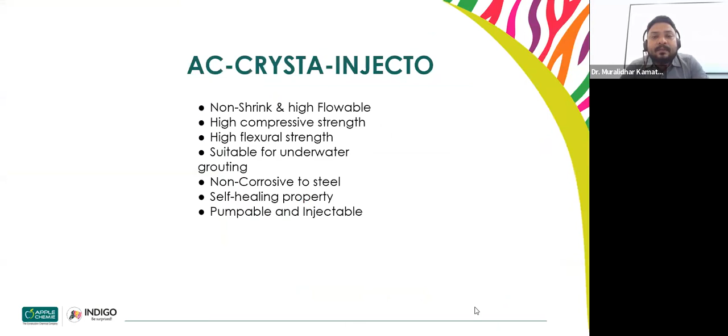Then this is one project I did with the government — a proposal for a new method for Panand Road, called Village Field Road. I created this concrete road, and within a span of 1 kilometer they required it. They gave us a cost of 27 lakhs, and it has been submitted to Mantralaya. It can be opened to traffic within 1 or 2 hours, because it is a very low traffic area.

And it's without any cement at all — it's only waste material that we used to cast it. Also, as I talked about Liverpool University, Dr. Anna Brass visited our lab, and we worked with her on bio-additive self-healing concrete. And this again relates to nanotechnology in internal curing, which I already explained.